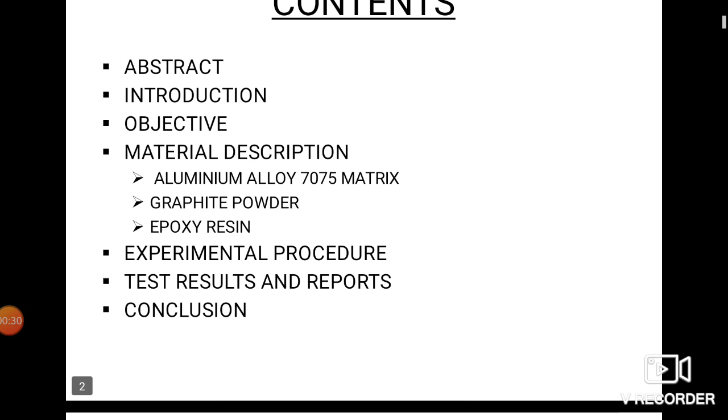Firstly, contents. Contents involves abstract, introduction, objective, material description, experimental procedure, test results and reports, and lastly, conclusion.

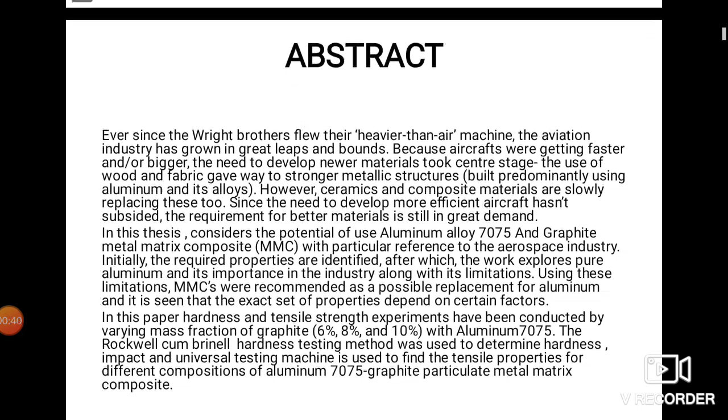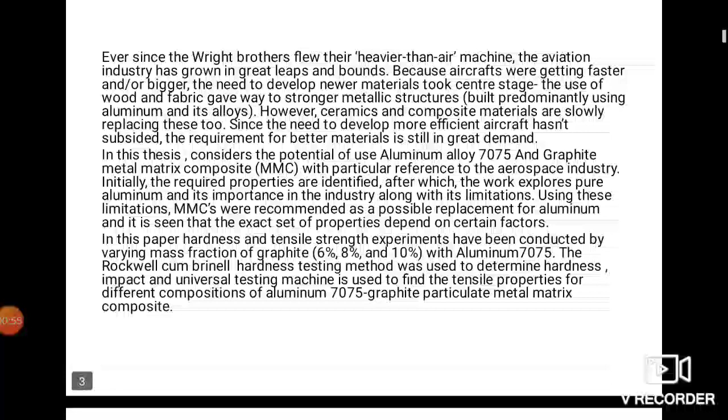First, abstract. In this thesis, we consider the potential use of aluminum alloy 7075 and graphite metal matrix composite with particular reference to the aerospace industry. Initially, the required properties are identified, after which the work explores limitations.

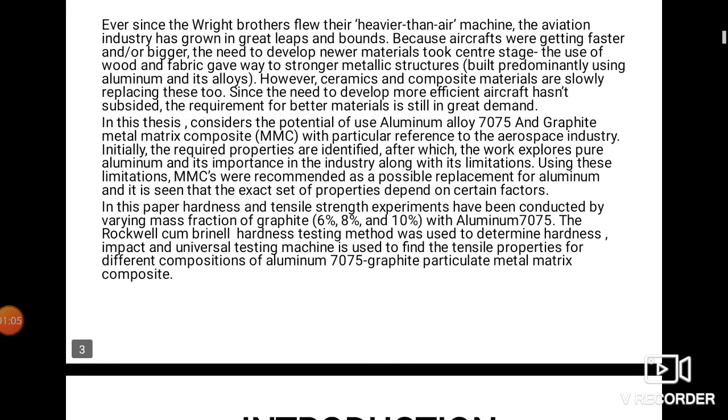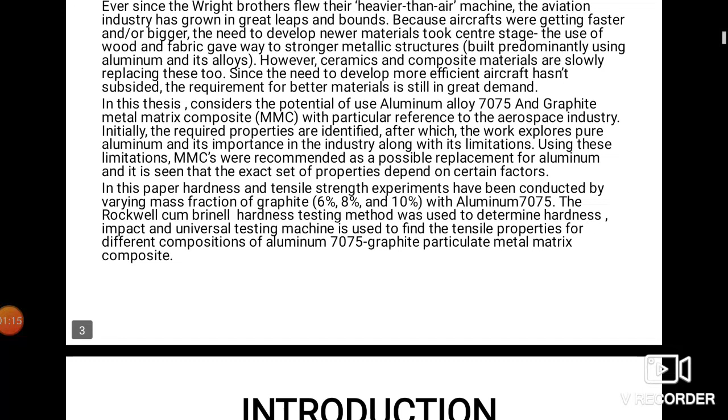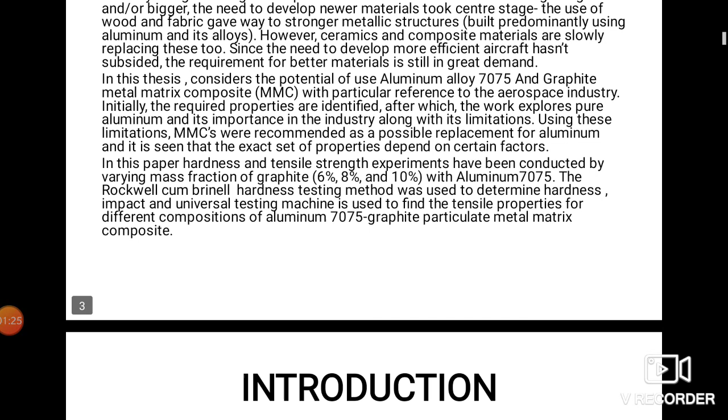MMCs were recommended as a possible replacement for aluminum, and it's seen that the exact set of properties depends on certain factors. In this paper, hardness and tensile strength experiments have been conducted by varying mass fraction of graphite, that is 6%, 8%, and 10% with aluminum 7075.

The Rockwell cum Brinell hardness testing method was used to determine hardness.

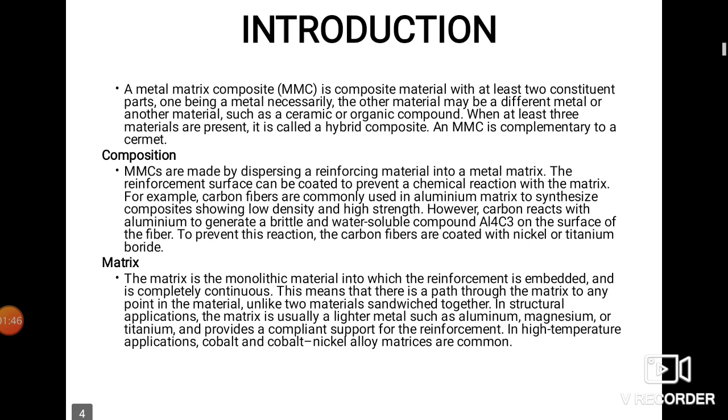Let's go to introduction. A metal matrix composite (MMC) is a composite material with at least two constituent parts: one being a metal, which we are using aluminum 7075, and another material, in which we are using graphite.

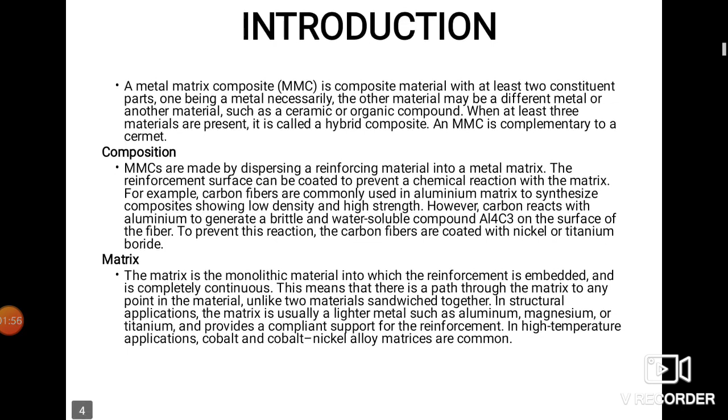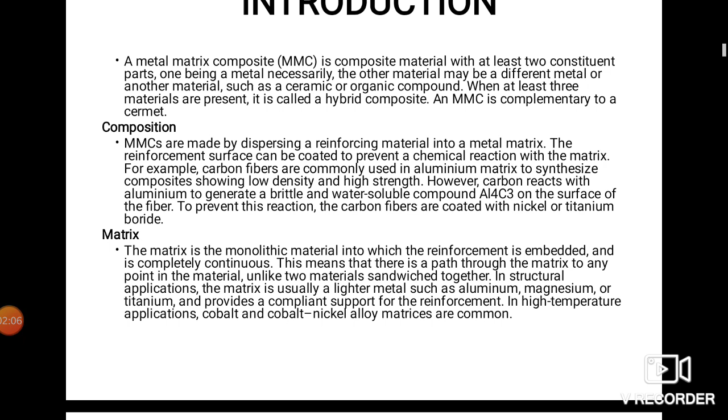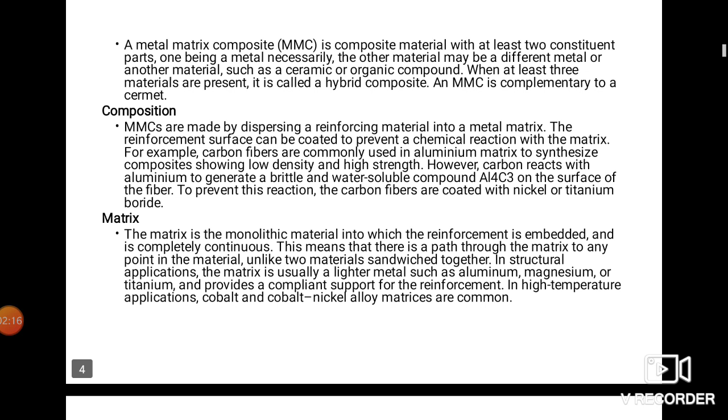Composition. MMCs are made by dispersing a reinforcing material into a metal matrix. The reinforcement surface can be coated to prevent a chemical reaction with the matrix. For example, carbon fibers are commonly used in aluminum matrix to synthesize composites showing low density and high strength. However, carbon reacts with aluminum to generate a brittle and water-soluble compound Al4C3 on the surface of the fiber.

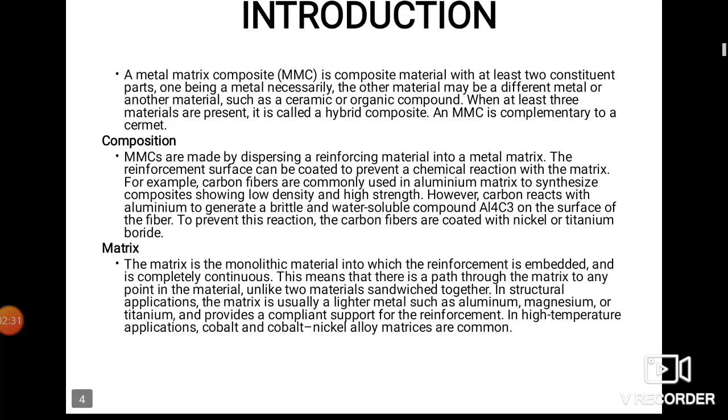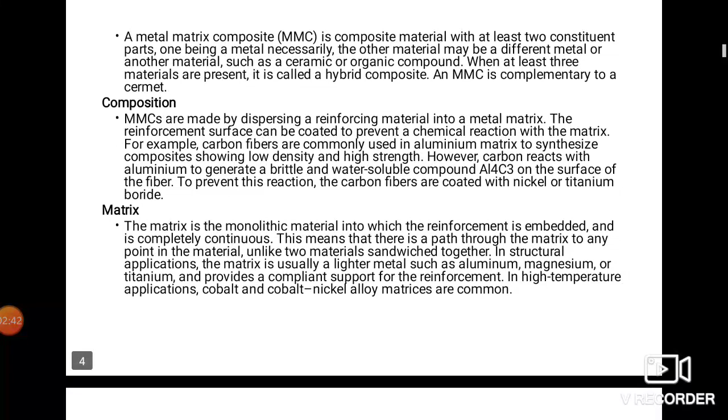Matrix. The matrix is the monolithic material into which the reinforcement is embedded, which is completely continuous. This means that there is a path through the matrix to any point in the material, unlike two materials sandwiched together. The objectives of this project are:

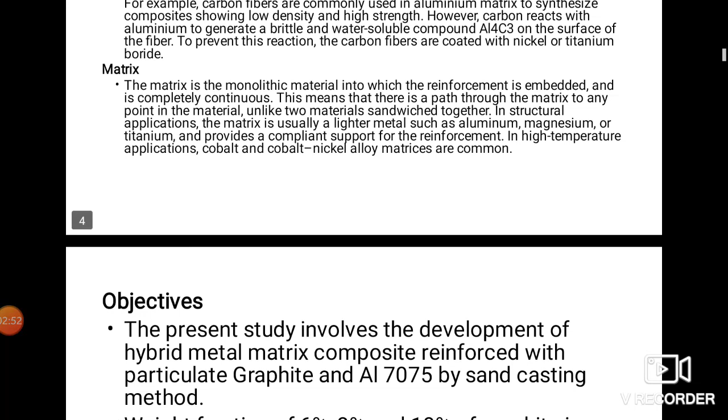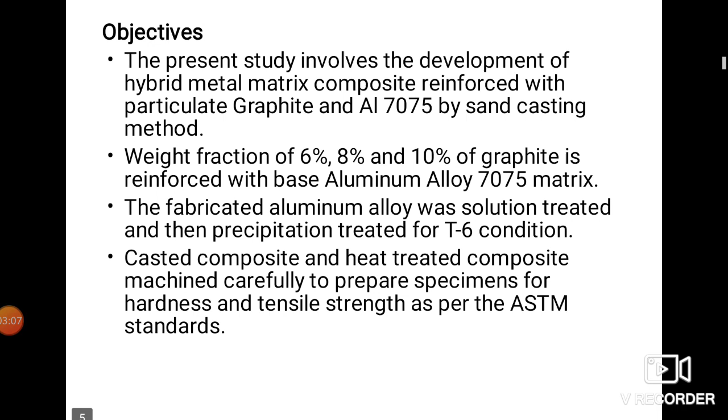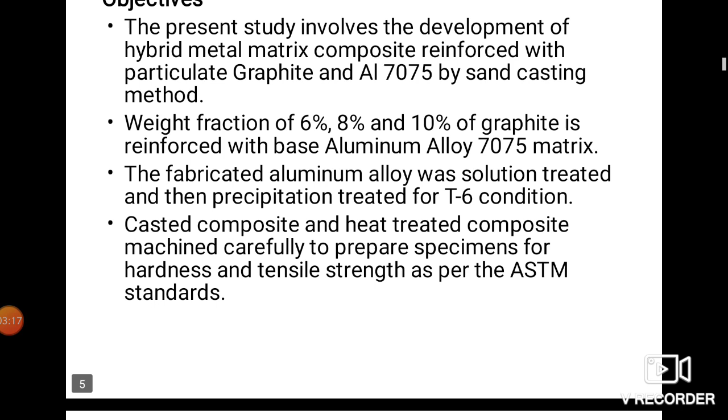The present study involves the development of a hybrid metal matrix composite reinforced with particulate graphite and aluminum 7075 using the sand casting method. Weight fractions are varied using different proportions, that is 6%, 8% and 10% of graphite with aluminum 7075 matrix. The fabricated aluminum alloy was solution treated and then precipitation treated for T6 condition.

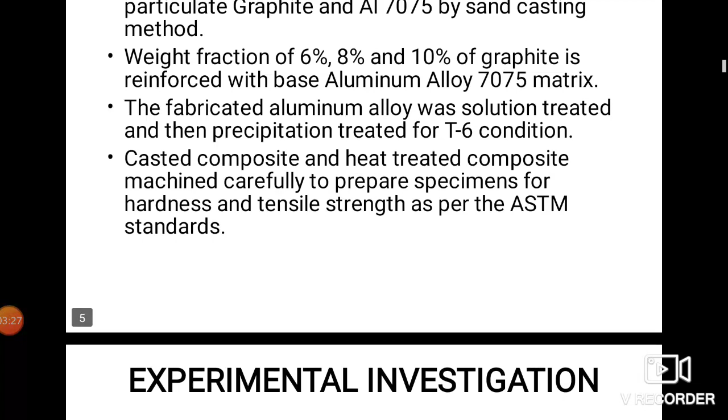Next, experimental investigation.

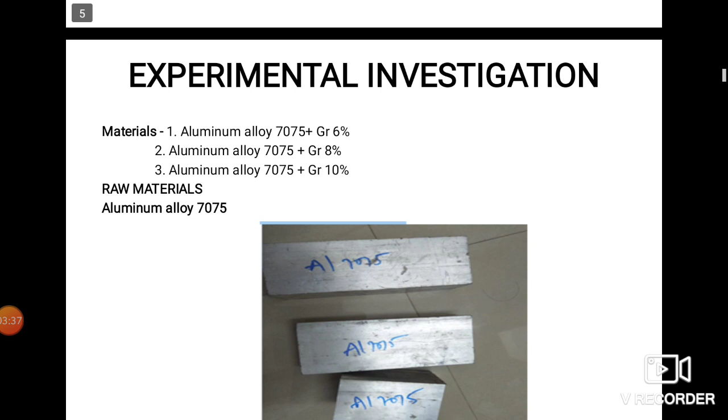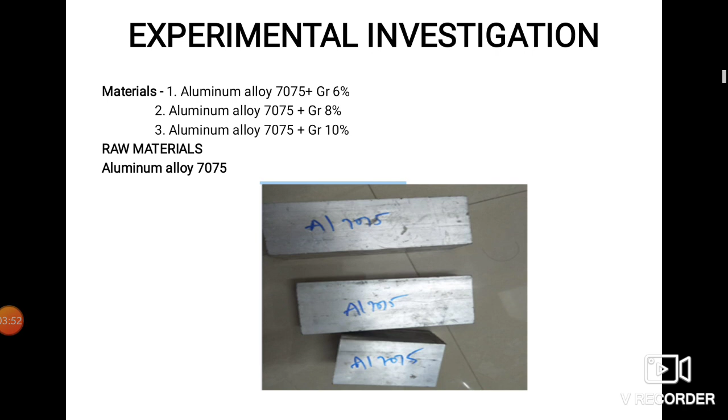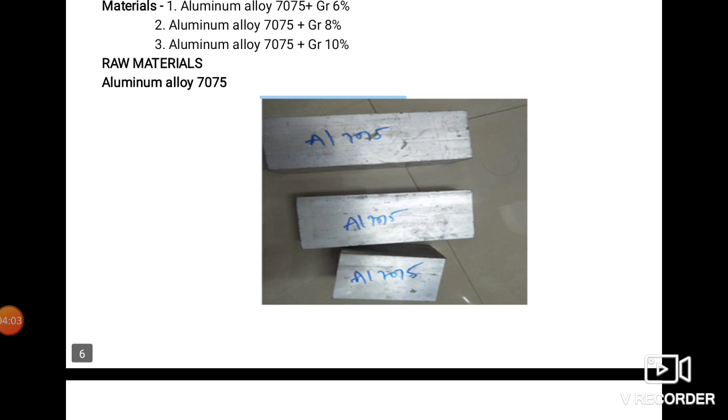Casting. Casting is a manufacturing procedure in which liquid material is usually poured into a mold which contains a hollow cavity of the desired shape and allowed to solidify.

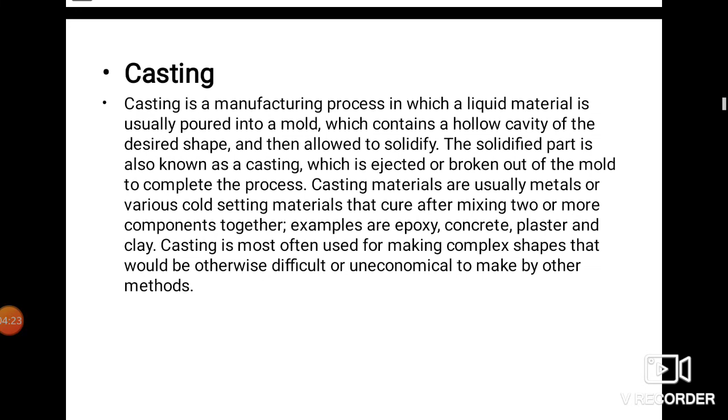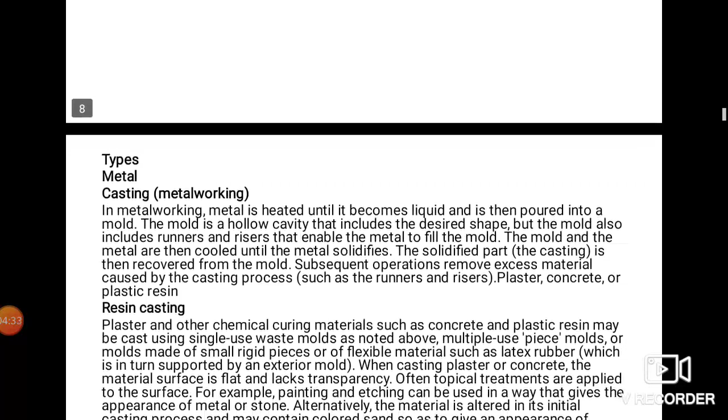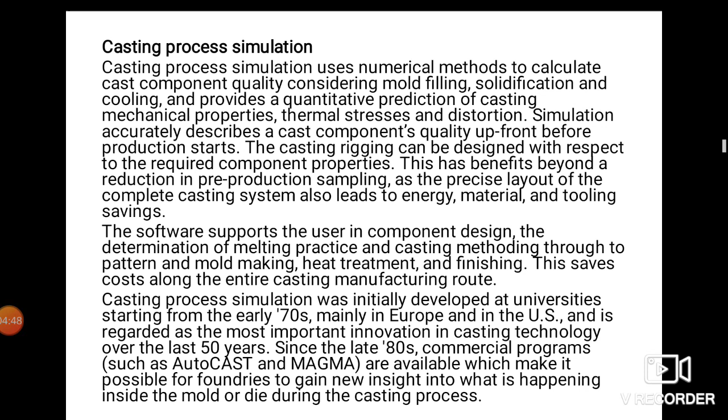In this, we have used sand casting, but there are different types of casting, namely resin casting, fettling, and here is the casting process simulation. Casting process simulation uses numerical methods to calculate cast component quality considering mold filling, solidification and cooling, and provides a quantitative prediction of casting.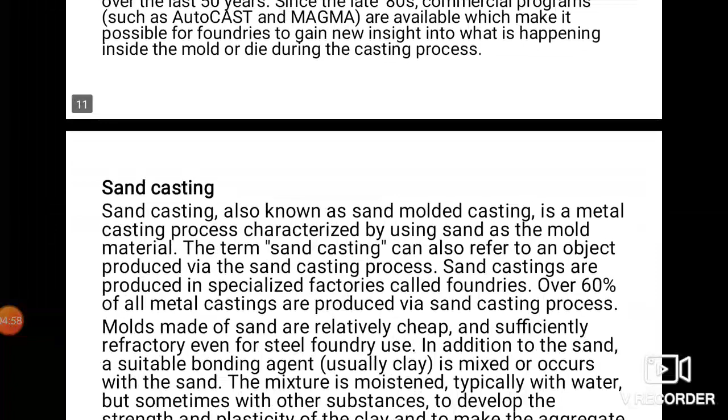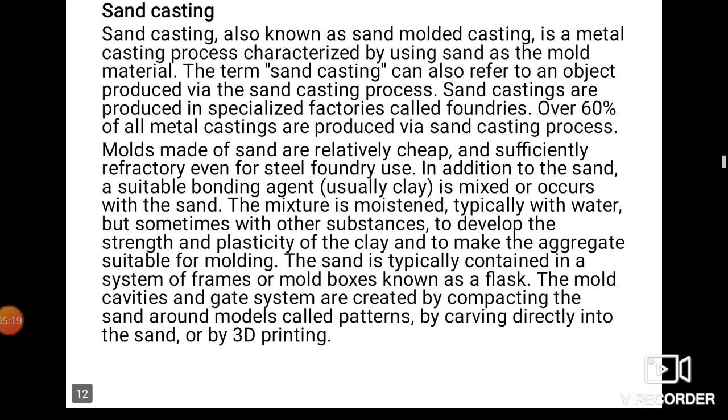The sand casting method which we have used is also known as sand molded casting. It is a metal casting process characterized by using sand as the mold material. The term sand casting can also refer to an object produced via the sand casting process. Sand castings are produced in specialized factories called foundries. Over 60% of all metal castings are produced via the sand casting process.

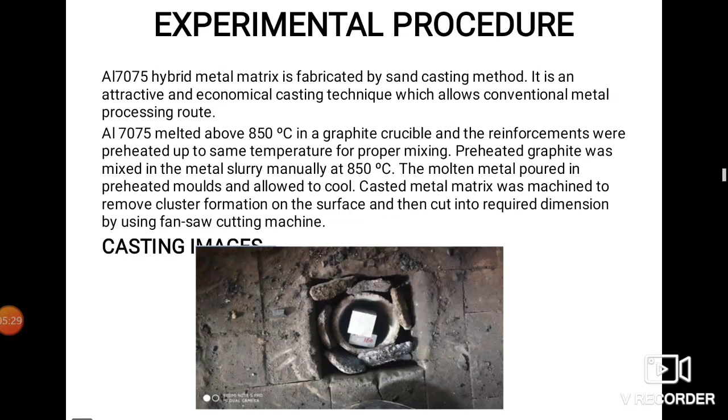Next, the experimental procedure. Aluminum 7075 hybrid metal matrix is fabricated by the sand casting method. It is an attractive, economical casting technique. That's why we have chosen it.

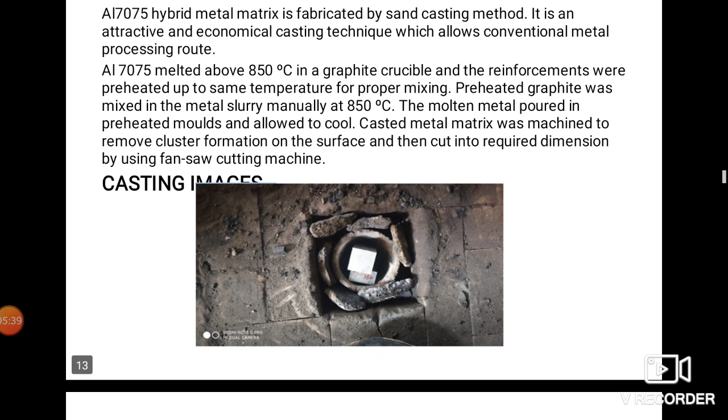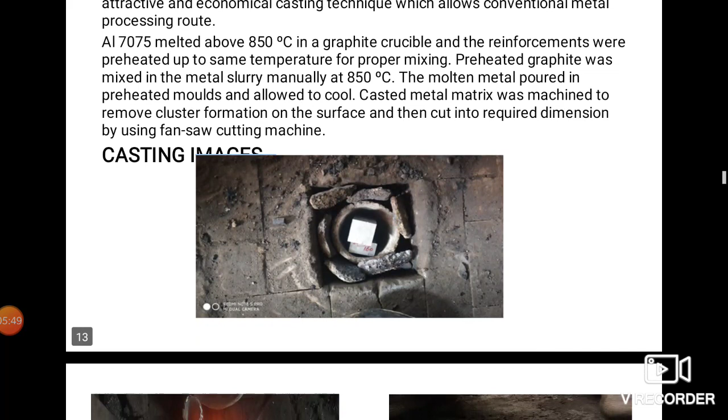Aluminum 7075 is melted up to 850 degrees in a graphite crucible and the reinforcement was preheated to the same temperature. Preheated graphite was mixed into the metal slurry manually at 850 degrees. Here are the casting images.

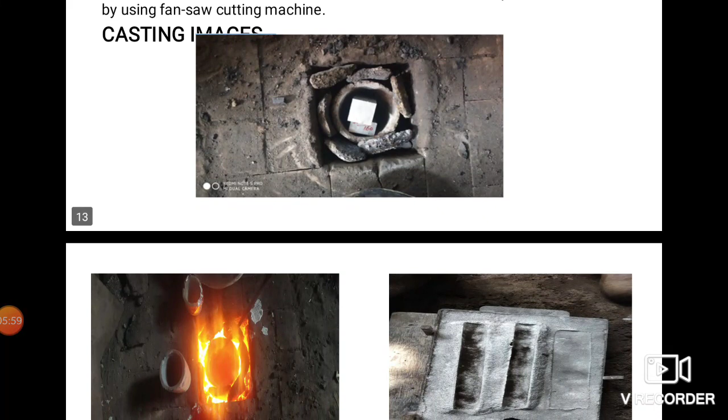In this figure you can see it is heated up to 850 degrees, and the patterns are also displayed on the right side of your screen.

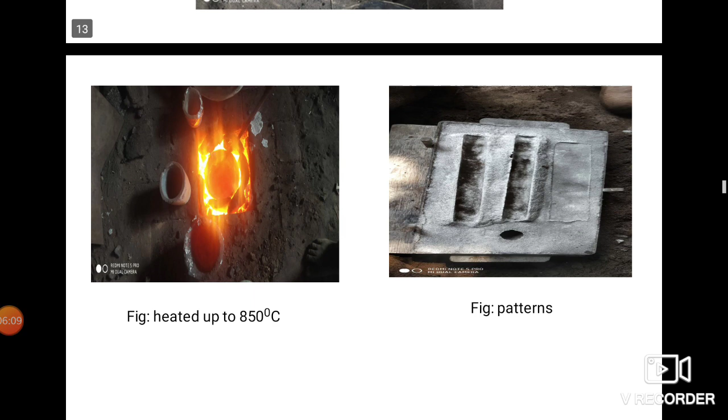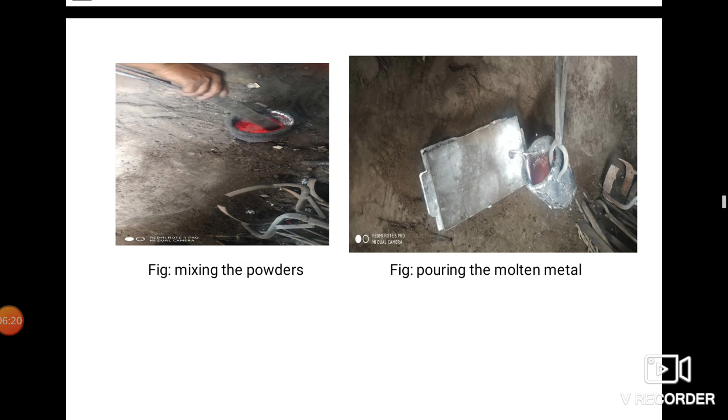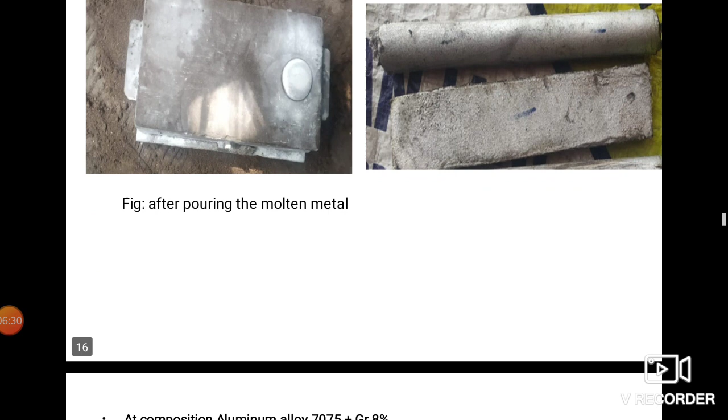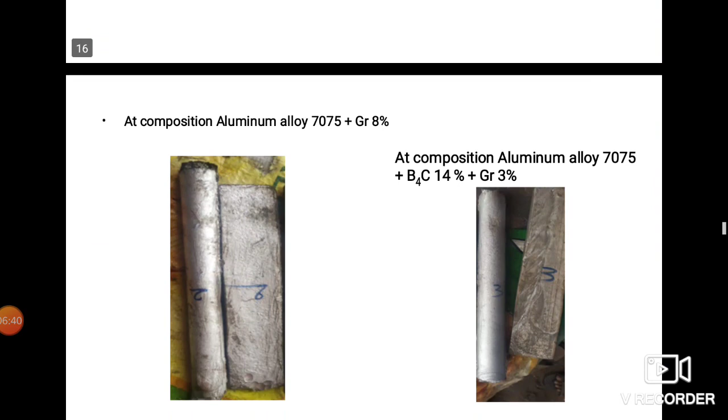This is the image of aluminium 7075 with 6% of graphite. This is the image with 8% graphite proportion, and lastly 10%.

We wanted to use the specimen in a double dumbbell shape, so that's why we machined it in a double dumbbell shape. Here are the images, and you can see that we worked according to the ASTM standards.

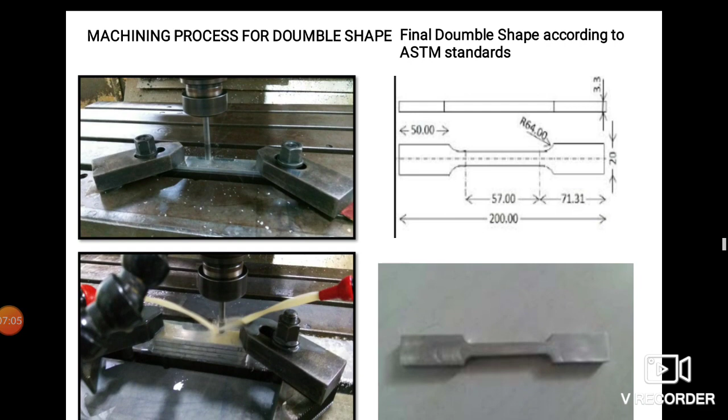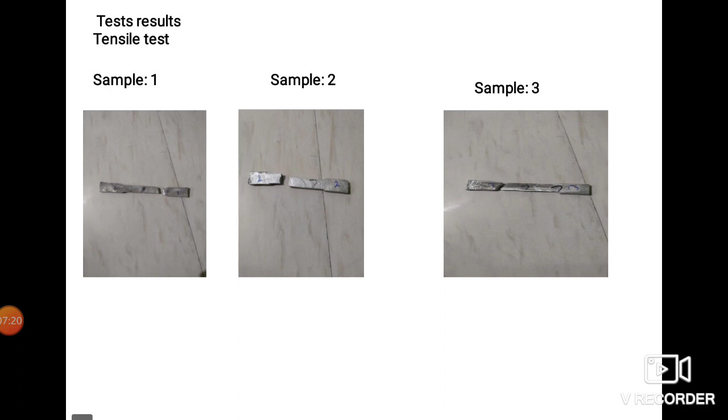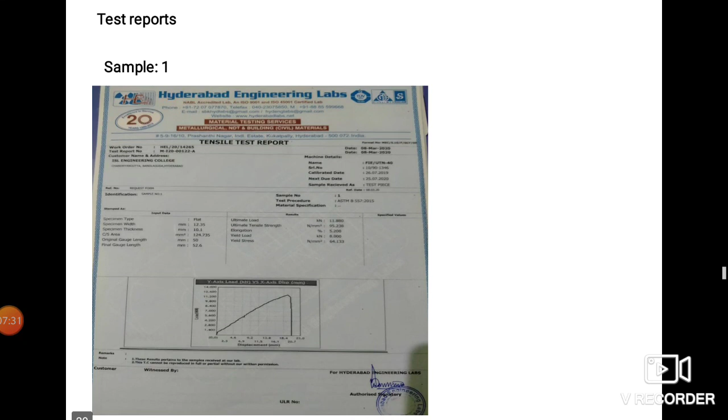Here are the test results for the tensile test. The first sample contains 6% graphite, the second one 8%, and the third one 10%. We conducted the test reports from Hyderabad Engineering Labs, which is a trusted company, and you can see the tensile test report on your screens.

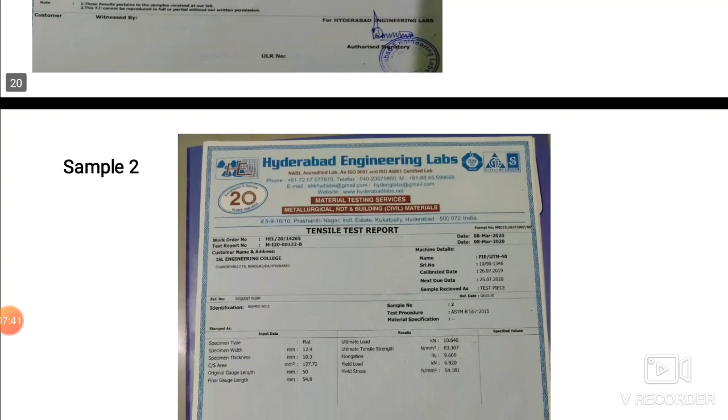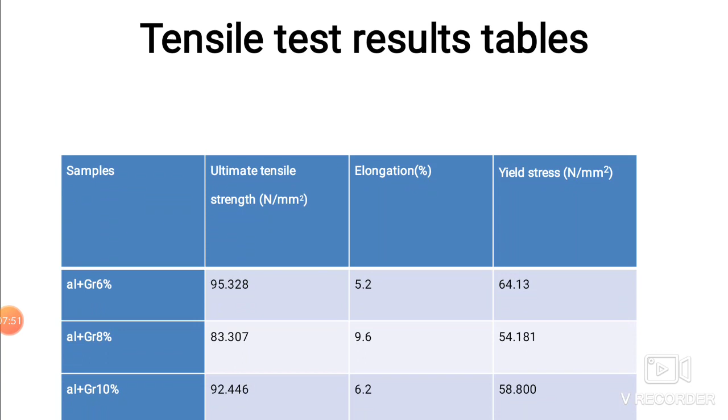Next, we have also completed the test with all three samples, and you can see all those images on the screen. I will explain the samples and the results we have got from it.

With the 6% proportion, we got an ultimate tensile strength of 95.328 Newton per mm square, and the elongation was 5.2%, with a yield strength of 64.13 Newton per mm square.

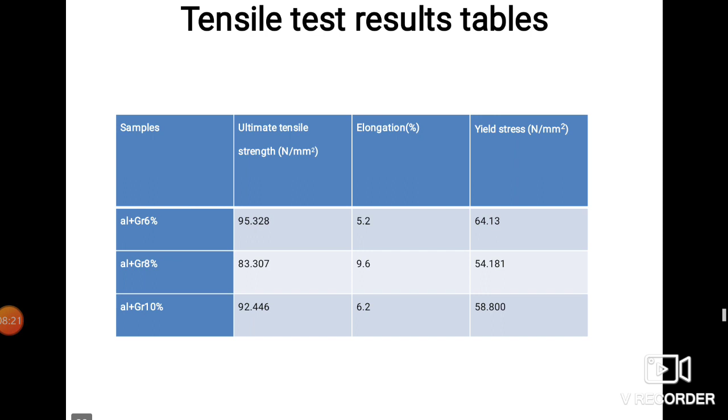With 8%, the ultimate tensile strength decreased to 83.307, and the elongation increased to 9.6%, whereas the yield strength decreased by about 10 Newton per mm square.

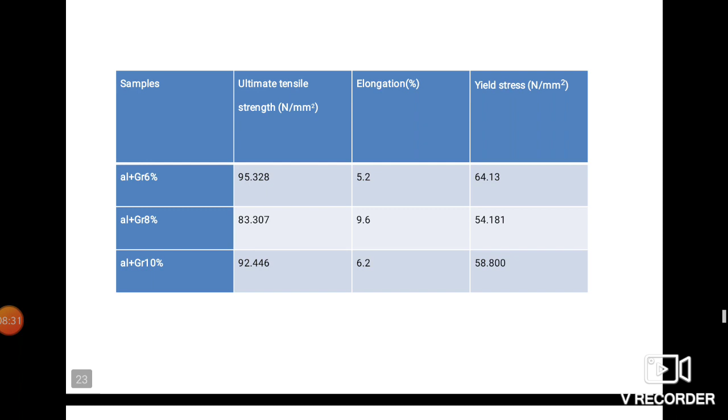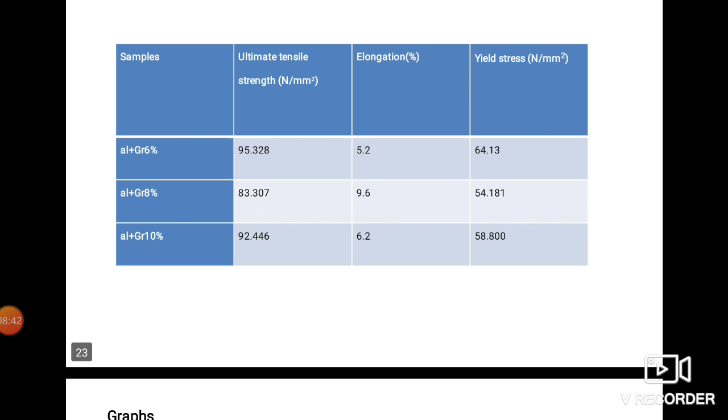In the case of 10%, the ultimate tensile strength increased to 92.446 to be exact. Elongation decreased to 6.2%, and the yield strength was seen as 58.800 Newton per mm square.

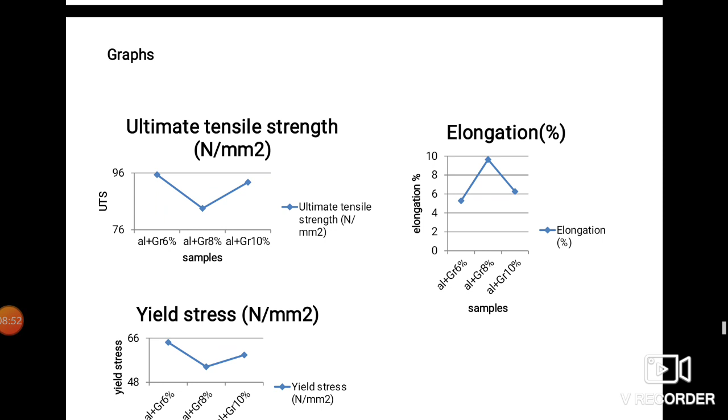These are the graphs for the ultimate tensile strength. You can see the elongation and also the yield strength.

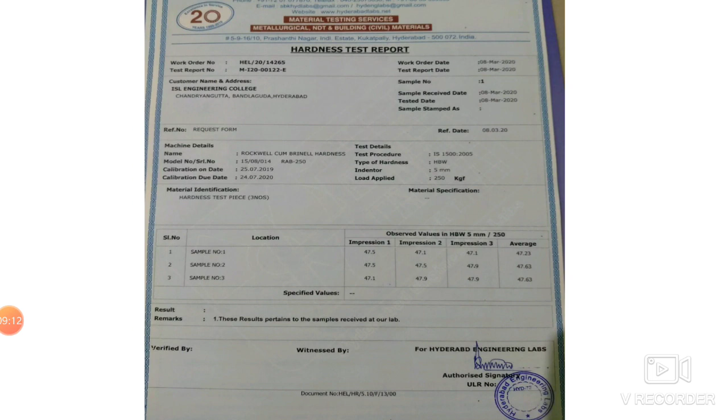Next, we conducted the hardness test from the same company, Hyderabad Engineering Labs, and you can see the samples on the screen, the impressions of the samples.

Next, I am going to discuss the hardness test tables from the samples. The first test sample with 6% graphite and aluminium 7075 showed a Brinell hardness number of 47.23, whereas with 8% it slightly increased to 47.61.

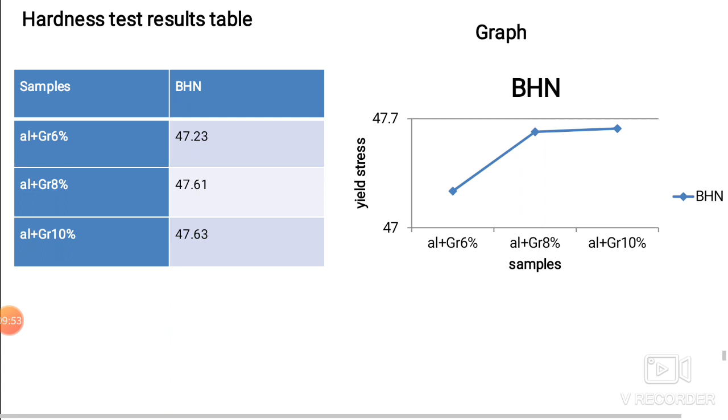On the right side there is a graph of Brinell hardness number with the different samples. You can see the curve slightly increasing with the increasing percentage of graphite.

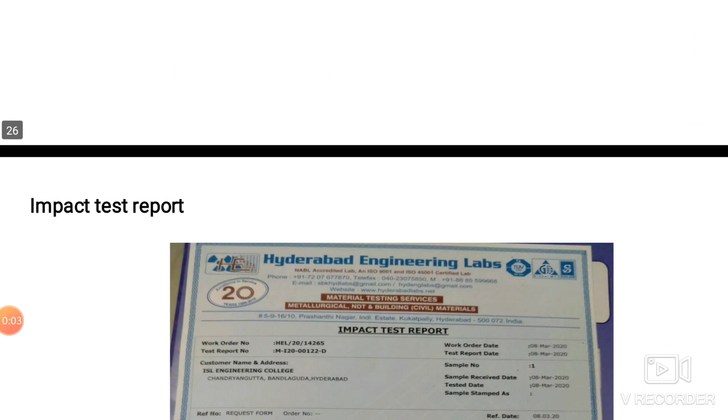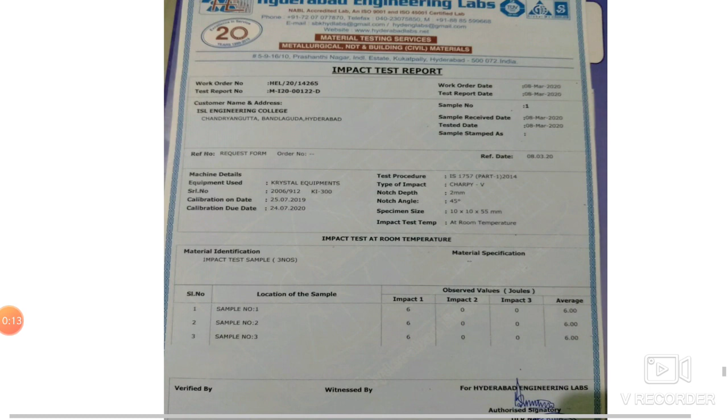Lastly, we have the impact test report of all three samples. You can see the impact test on sample 1 conducted is 6, and the average is 6.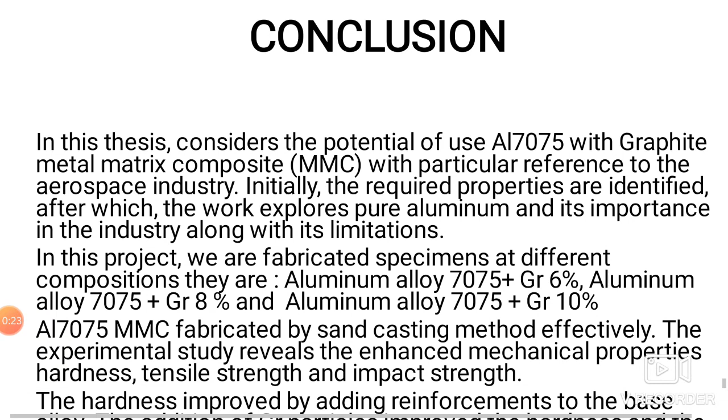Finally, the conclusion. In this thesis, our team has gathered information and has come to know the potential use of aluminum 7075 with graphite metal matrix composite, with particular reference to the aerospace industry. This project has a lot of advantages in this industry.

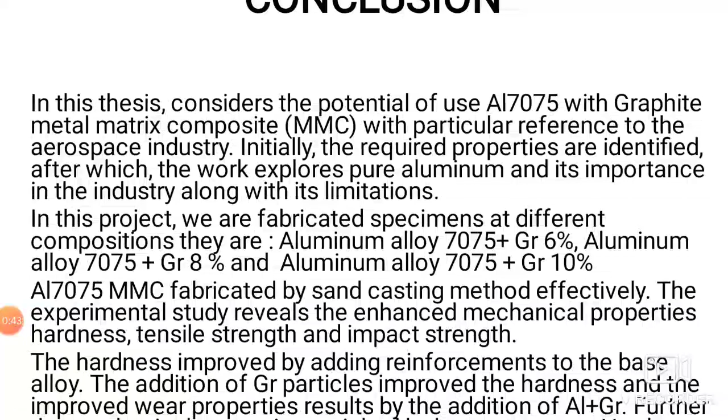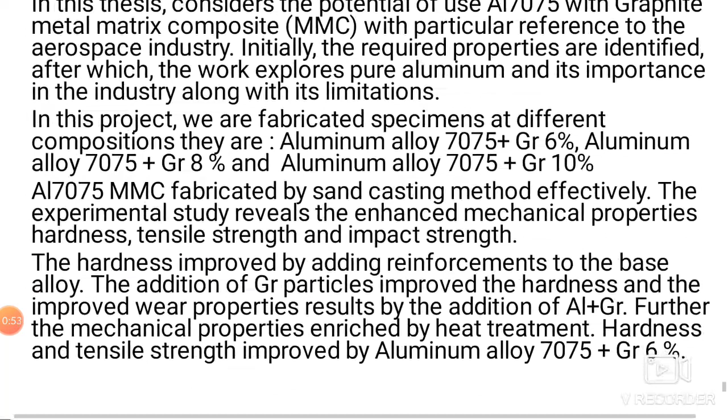Initially, these required properties are identified, after which the work explores pure aluminum and its importance in the industry. In this project, we fabricated specimens at different compositions: aluminum 7075 with 6% graphite, next with 8% graphite, and lastly with 10% graphite.

These are fabricated by the sand casting method. We chose this casting method because it was simple, easy, and saved money.

The casting procedure reveals that it has enhanced mechanical properties: hardness, tensile strength, and impact strength. The hardness improved by adding reinforcement to the base alloy. The addition of graphite particles improved the hardness and wear properties resulting from the addition of aluminum and graphite.

Furthermore, the mechanical properties were enriched by heat treatment; hardness and tensile strength improved for aluminum alloy 7075 with 6% graphite powder.

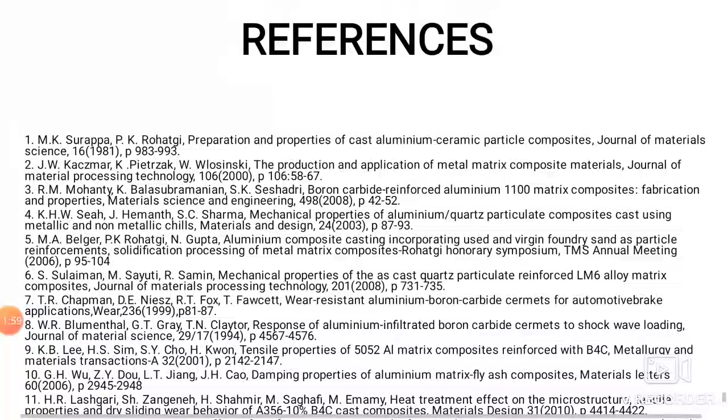Lastly, these are the references from which we have taken the different proportions. There are a lot of references.